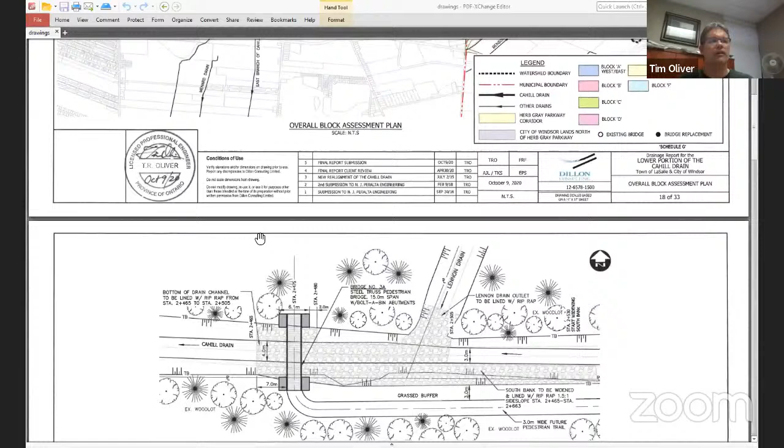So this is just an enlargement of part of the Cahill drain. Here is the Lennon drain coming in. So this is about the midway point of the Cahill drain where the Lennon drain comes in. And predominantly the work of improvements to the drains start in this area.

This shown here is a future pedestrian walkway bridge that is a part of future trail improvements that exist along the Cahill drain. And it's also part of the identified work, since it's a structure going over top of the Cahill drain in the future. The costs associated with this future bridge are charged against the town. There's really no charge of cost to landowners for that.

The works contained within this part of the Cahill drain involve mainly a widening of a section of drain here. Being that you're getting all the flow from the Lennon drain in this location, there were noticeable signs of deterioration and erosion within the Cahill drain. So we're looking to address that by placing the erosion protection needed, which is mainly a Gabion stone rock liner over a portion of the channel, particularly on the south bank of the drain. And that work is recommended to continue, and is really a transition of the drainage that is upstream, where it picks up the Lennon drain and continues downstream.

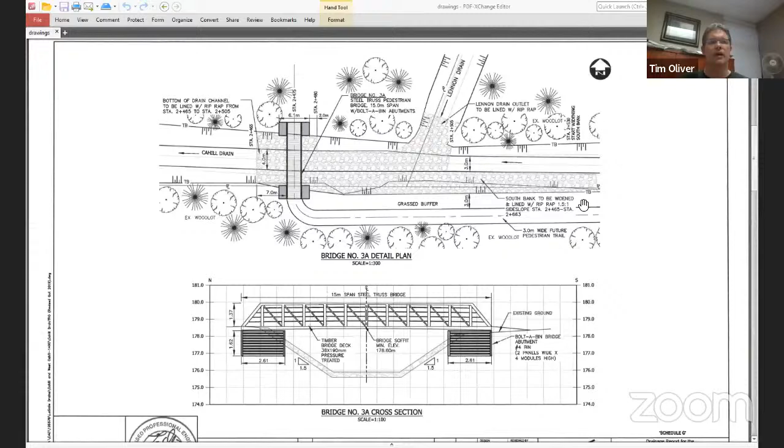As we continue further up the Cahill Drain, where we picked up from the previous plan there, you can see again, once we're past this existing woodlot area, works are still continuing on the south side to essentially widen that part of the channel. And then when we get to the point here, we're at the existing utility corridors for the hydro and Plains Midstream pipeline areas. The drain here is now recommended to take a new course of alignment, where the drain is heading more to the north and heading up to join back in with the current drain alignment.

This is a relocation that was part of a request by the owners of the lands for the Forest Trails Estates development. And so these works of the Cahill Drain realignment are also a part of this report. So basically this realignment of the drain is to improve, again, the capacity of the existing Cahill Drain, because we found there to be deficiencies in the capacity of the current drain. The current drain right now, you can see in a lighter alignment line here, is actually going right through where this future development would be located.

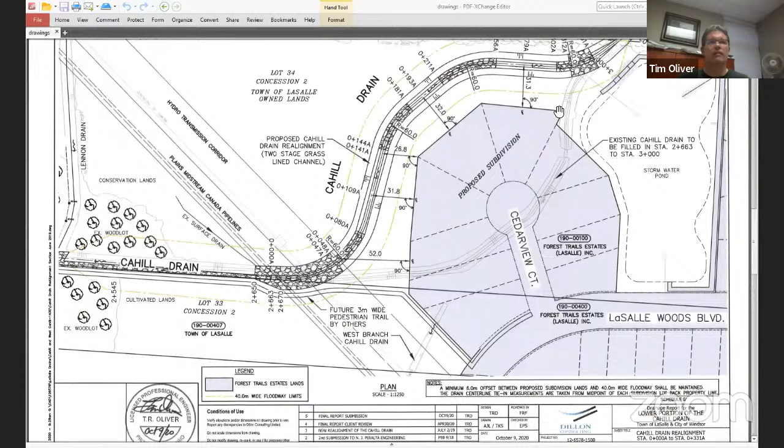Continuing past this drain realignment and heading further upstream on the Cahill Drain. So what you see here, here's this pond, here's the realignment. So picking up at this point and continuing upstream for approximately 500 meters from this point, this is going through again lands that are partially protected under the woodlot and are not under any existing development.

The works involved here are again a widening of one side of the drain, and we've selected that the widening improvements would be along the north side of the Cahill Drain for this section, continuing up to where Sandalwood Court is located. That's basically where Sandalwood Court is, an existing street that terminates right here just before the Cahill Drain.

And then continuing further east beyond Sandalwood Court, our recommended improvements go to the south side, and access to the south side is more easily found through an existing road allowance that's undeveloped but owned by the Town of LaSalle, where we can get access for construction and doing that improvement over to Huron Church. So there's a means of getting access from that location, so we've chosen the south side for the improvement there.

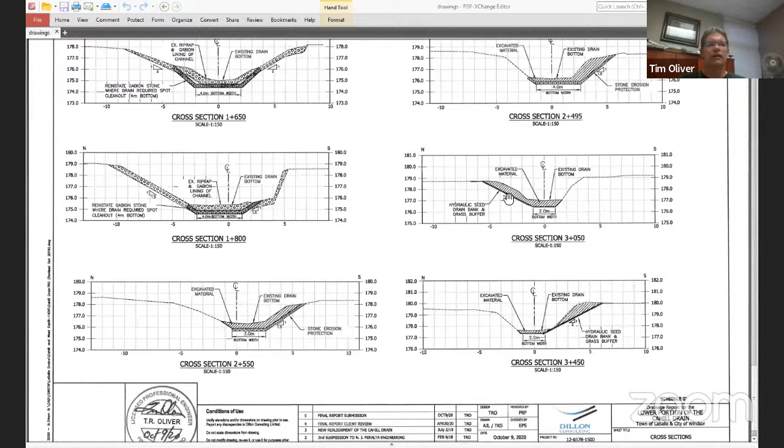Just to show a little bit of detail of what this drain improvement looks like, that's between station 3+000 and station 3+500. These two sections show where that widening of the drain is; you can see the existing channel and what the widening looks like. Again, the north side is selected for part of it, and the south side for the upper part. The widening is not too significant, but we found that based on past improvements going back to the late 1980s, the drain no longer has maintained that capacity.

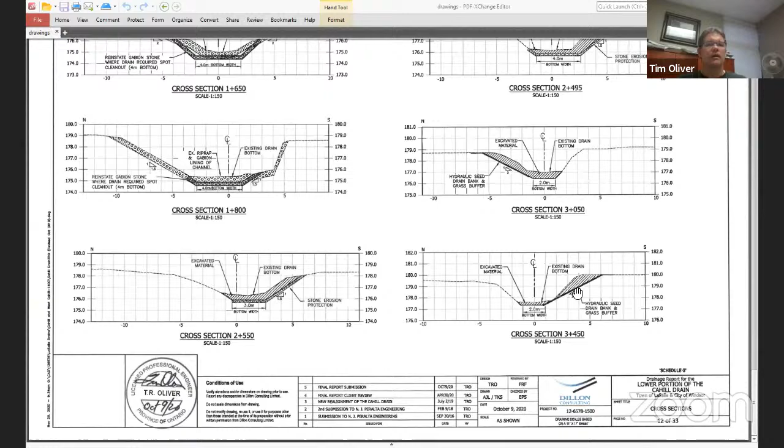And so these are necessary improvements to convey the minimum capacity required for a municipal drain serving the type of lands we're dealing with, which as I said earlier are mostly residential areas served by the Cahill Drain. So that gives you an idea of the work involved.

As Jonathan mentioned, the cost of the engineer's report to get it to this stage, to the point of passing it under the bylaw, is under an agreement with the Ministry of Transportation, where they've agreed to pay all those costs as part of the overall drainage works. There are also costs assessed to the ministry for other parts of the work as well, as they are a contributor.

In our review of the design of the parkway work, there is a fairly large stormwater pond facility that was built specifically for the part of the highway that was going to drain into the Cahill drain. And we found through our examination of those design works that the pond is sized sufficiently to allow the drainage from the parkway to be controlled.

So essentially all the drainage from the highway is piped through a storm sewer system into a pond. And then it's released from the pond under a control orifice pipe that only allows a small amount of flow to ensure that up to the 1 in 100-year storm event, no greater flow rate would cross the highway than what had previously been the case before the parkway works had started. And we've confirmed through our analysis that is the case.

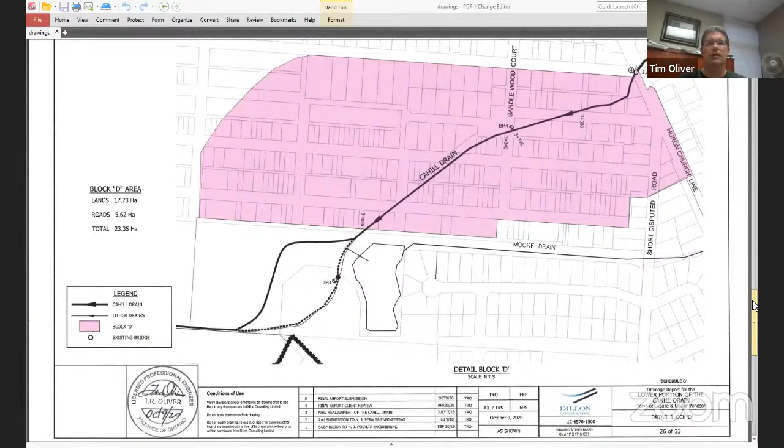So I guess with that, that's basically just a quick overview of what is contained within the report. And so at this point, I guess I can turn it back to Jonathan. Thanks. Thank you, Tim. And I think if Tony has anything he'd like to go over, we could do that now.

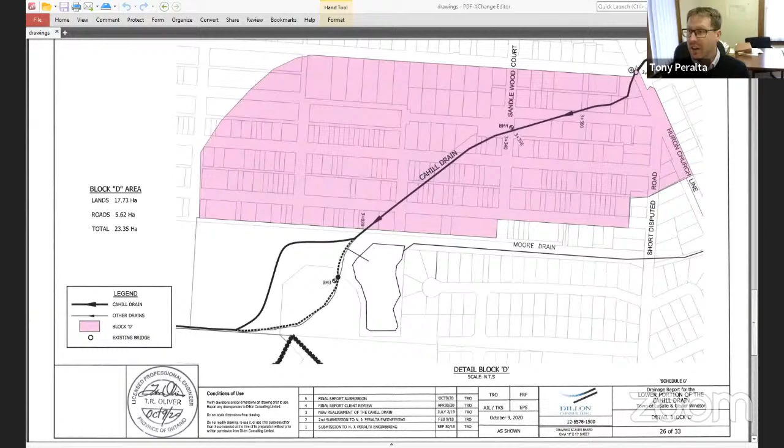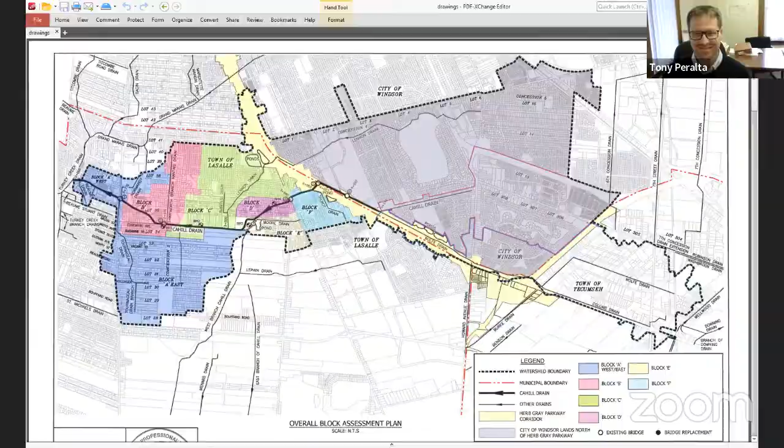Sure. Thank you, through you, Mayor Bondy. I do have a very short PowerPoint presentation, so I'll share my screen. Oh, I do not have. I do. What? There we go.

So just a very short presentation, just to kind of outline things. I didn't want to go into too much detail on the technical and assessment merits of this project, simply because that is more for the Court of Revision. However, I felt it was very important to identify some of the key aspects of the project to help guide and assist on the project details. So as Tim had alluded to, this is a joint appointment where Peralta Engineering and Dillon have jointly been assigned this project through the provisions of the Act.

I'm not sure how many of you are familiar with the Drainage Act. However, it is one of the oldest pieces of legislation, created in the late 1800s, and it specifically deals with communal drainage projects called municipal drains. As Tim noted, this particular project is intended to address the overall improvements to the municipal drain, to reestablish drain parameters, cost distributions, cost allocations, and future maintenance provisions.

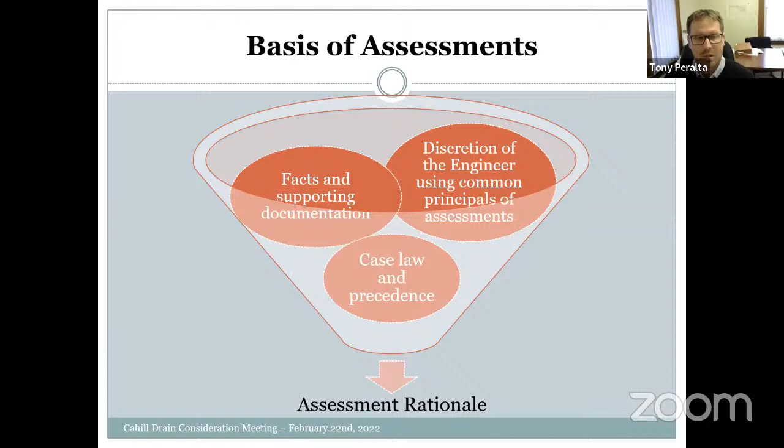So when it comes to assessments, there's three distinct types of assessments under the Drainage Act. The first one being a benefit assessment, and that is mainly derived by how the drainage system could potentially affect each property, either by increasing property value, increasing appearance, better control of surface or subsurface water, ease or reduced maintenance, and so on and so forth. A way I like to explain benefit is how the drainage improvements affect you if the drain didn't exist, and how would your stormwater affect the property.

And then when it comes to outlet and injuring liability, it is generally calculated based on the amount of runoff produced from the property, based on area and general use of the land. There are special assessments or special benefits under the Drainage Act. Not always that common, however, they are there for any additional work or features included in the project that has no real effect on the functionality of the system, such as a special or a private feature that is essentially assessed to one property or benefits only one property.

And then we have special assessments under Section 26 of the Drainage Act, where the road authorities or public utilities are assessed all increased costs caused by their existence. So in other words, if a road or utility did not exist, would that portion of the drainage works be required? A perfect example of that is a road crossing. If the road crossing did not exist, the drainage system could be conveying water as an open channel. And therefore, the road authority, in that case, would be assessed the additional cost for enclosing it and putting a pipe.

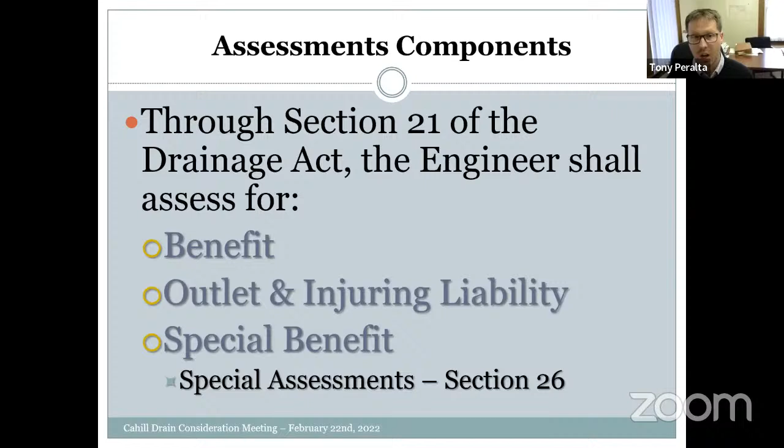So as noted in Part B of the report, assessment considerations, the report is rather detailed. I didn't want to get into too much of that, especially considering the fact that this is more of a technical based meeting. But the report does go into a lot of these details, and also touches base a little bit on special considerations such as block assessments and effects of stormwater management. There is a consideration of the forthcoming Oldcastle Stormwater Master Drainage Plan, that we have collaborated with that engineer to ensure that we are consistent with how things are addressed. And the last portion is more or less dealing with how future development will be dealt with in the watershed.

The assessment component of the report does have assessment schedules included. One for construction, which distributes the cost for all the construction engineering works related to the project. And then there's future maintenance schedules, which distributes costs for all future works on the drain. Separate from the report, we did include a construction schedule of assessment based on the fact that the MTO is paying all the report costs. And that separate schedule removes the MTO cost for the report and identifies the reduced value affected to all the properties.